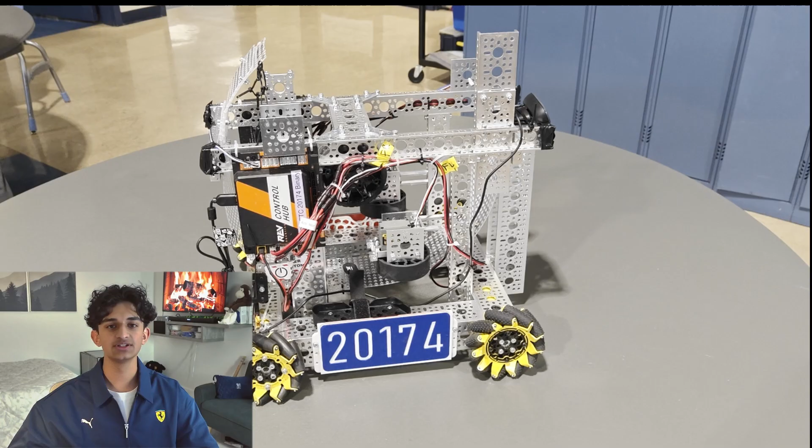Hi, I'm Om, and this is my second year in First Tech Challenge, and my first season with Maximum Entropy. I came onto this team as both a lead programmer and a backup driver, which ended up being a really valuable combination. Sitting right next to our main drivers during matches, I got to see firsthand what stressed them out, what slowed them down, and where things broke, and that gave me a clear picture of what our team actually needed.

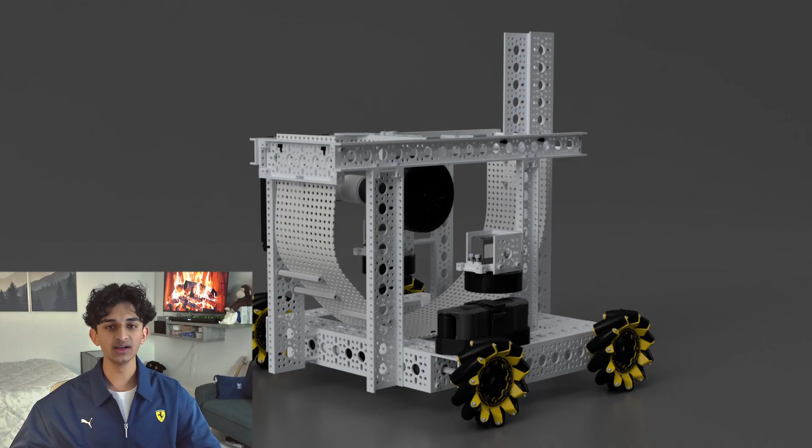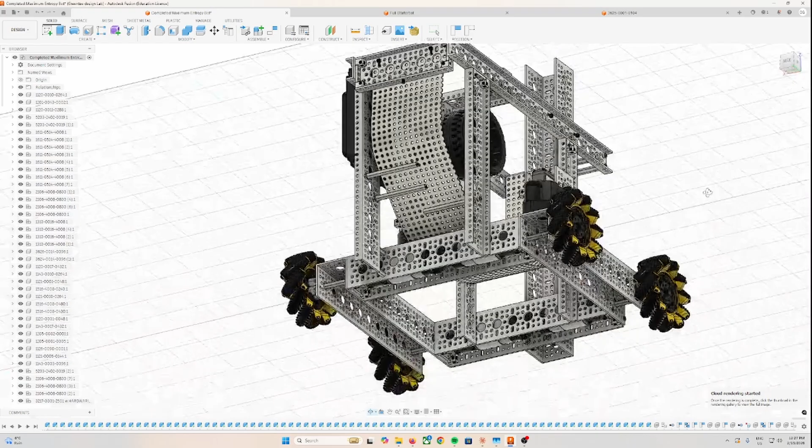It shaped everything I built this season around one idea: make the code work for the driver, not the other way around. Before any programming started, I designed the robot in CAD and modeled the entire thing virtually so we could test how mechanisms fit together and catch issues before we even assembled a single piece. That saved us a lot of time during the build phase. I also designed a version 2 of the robot with several improvements, but we ran out of time to build it before competitions. Still, that process taught me a lot about design iteration and thinking ahead.

On the software side, one of the first problems I noticed was that our drivers wanted full speed to cross the field quickly, but then couldn't make precise movements when it came time to score. They were either too fast or too slow with no middle ground. So I built 3 drive modes into the code: turbo at full power for crossing the field, normal at 80% for general driving, and precision at 40% for careful alignment. The driver switches between them with the bumper buttons, so they always have the right level of control for whatever they are doing.

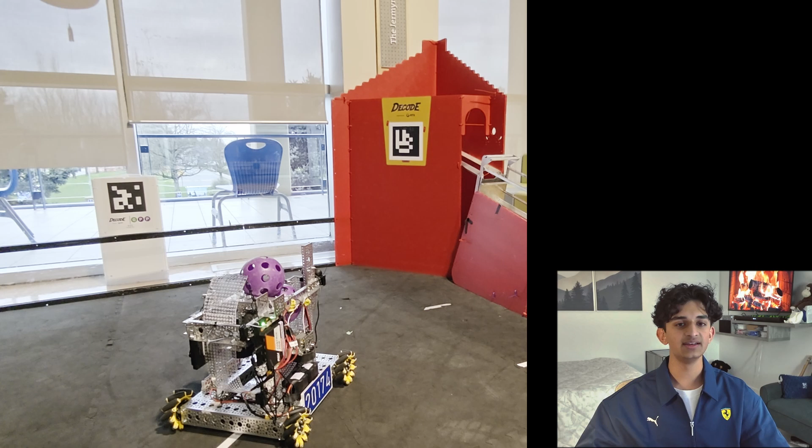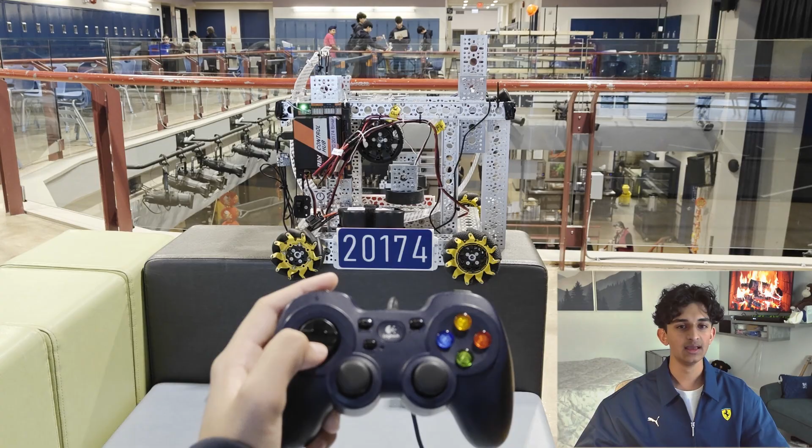The next challenge was launching. Our operator had to manually spin up the motor, watch the RPM, and time the servo release for 3 times in a row under match pressure. On top of that, we found that battery voltage changed how fast the motor spun, so a launch that worked well on a full battery would completely miss on a half-drained one. I solved both problems with a one-button launch system. The operator presses a single button, the code spins the motor to exactly 3250 RPM so it's consistent, and then automatically fires 3 balls with a timed servo pulse. With just one button, the robot handles the rest.

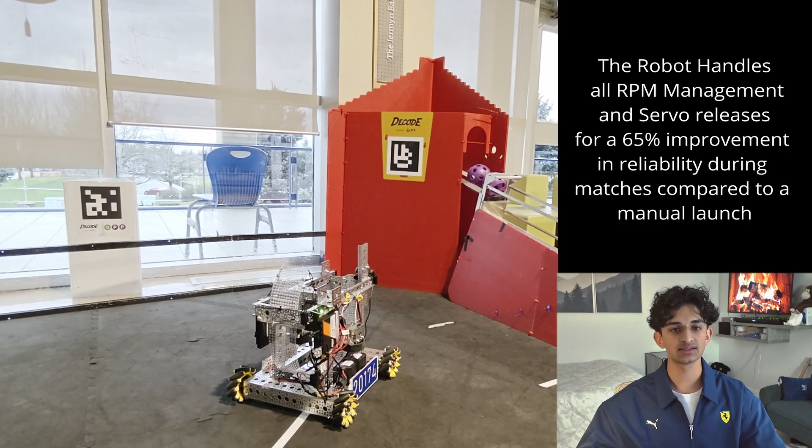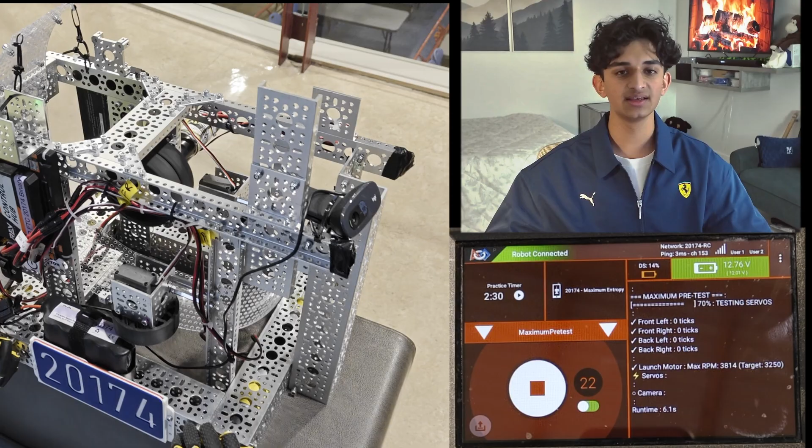And the work doesn't stop off the field. Before every match, things can come loose and wires can disconnect, and if you don't catch that before you start, you've already lost points. So I wrote a diagnostic test program that lets us check every motor and servo on the robot before a match to make sure nothing got unplugged or needs reconfiguring. That alone increased our reliability on the field.

I also built a universal emergency stop into our competition code, because safety is always a priority on the field. If anything goes wrong during a match, one button kills every motor and servo on the robot instantly, and it's a safety net the whole team can trust.

This season has been one of the best experiences I've had. I've sharpened my skills in Java, CAD, and real-time control systems, as well as learning how to design solutions around real people and real problems. And most importantly, I learned that the best engineering isn't about complexity, it's about reliability.